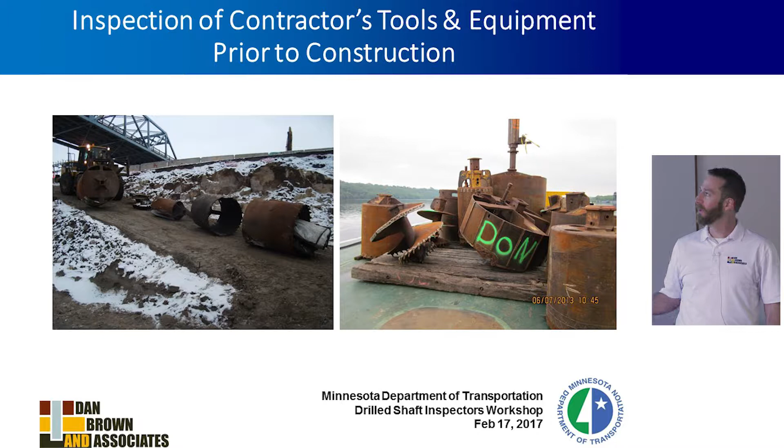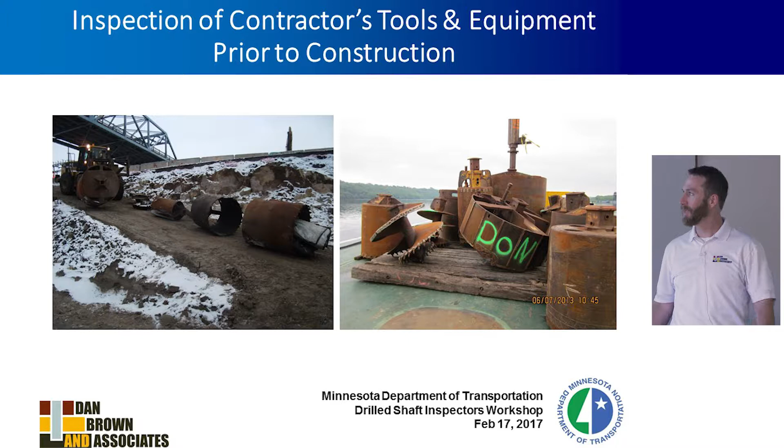All right, so we've gone over the forms and stuff. Now with boots on the ground, what do we look for? There's an installation plan. The contractor's described what tooling he's going to bring to the site, or she's going to bring to the site. Now it's time to go verify. So how do you verify? We've seen the checklist now, but now how do you actually make it happen?

So pre-construction, they've said what they're going to bring, so now it's time to go out and verify that they're on the ground and they're on the site per the approved installation plan. We want to identify, is there anything listed that's not there? Core barrels, augers, clean-out buckets, pumps, air lifts, air compressors, the list goes on and on. So now's the time to actually look for it and identify it.

Is the equipment in good condition? We'll get to that, some pictures of that. Make an inventory of the drill tool. So go down, take pictures, write everything down, everything that's on site. You ought to be familiar with that tool and make sure you have an inventory of that tool. And note that more tools can show up as the job goes on. So this isn't a once and done thing. This could be a living document. Check the dimensions, particularly the tools and the casing.

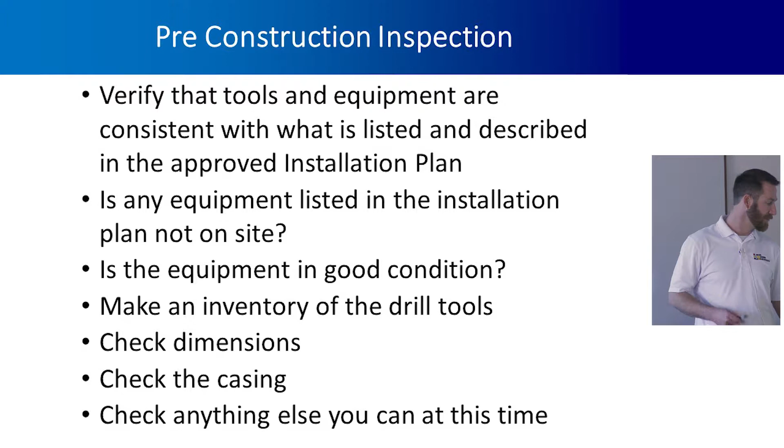Okay. All right. Typical installation plan will list the equipment. So for instance, the drill rig, this is St. Croix. Case was using a crane mounted rig. They tell you what the crane is going to be with the Series 2 drill attachment, the Calweld drill attachment you can see. And so all these little things that you guys know about, to make sure that they're not pulling a fast one. Vibratory hammer, boom on the crane, welding machines, all the earth augers, buckets and whatnot. So now's your time to make an inventory.

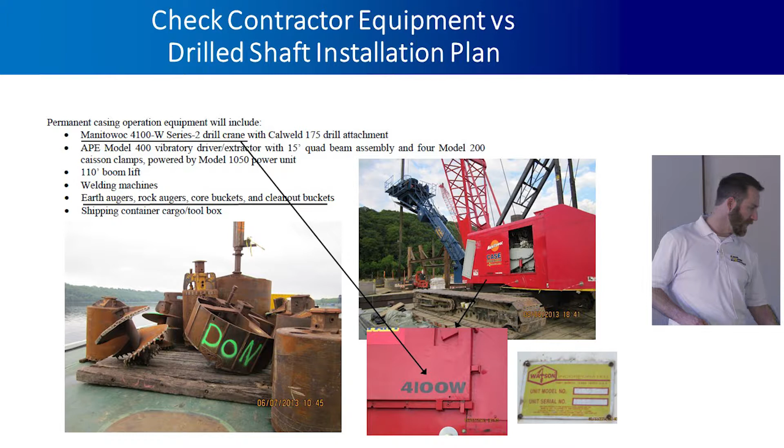So things to look at with respect to the casing installation, make sure they got all the tooling, not only to drill a hole in the rock socket, but to get the casing in the ground. The slurry equipment with the polymer unit, you'll need to make sure that the right amount of baker tanks are there, so they got the storage volume to handle their slurry operation, desanding equipment. All this stuff should be spelled out in an installation plan and a slurry management plan.

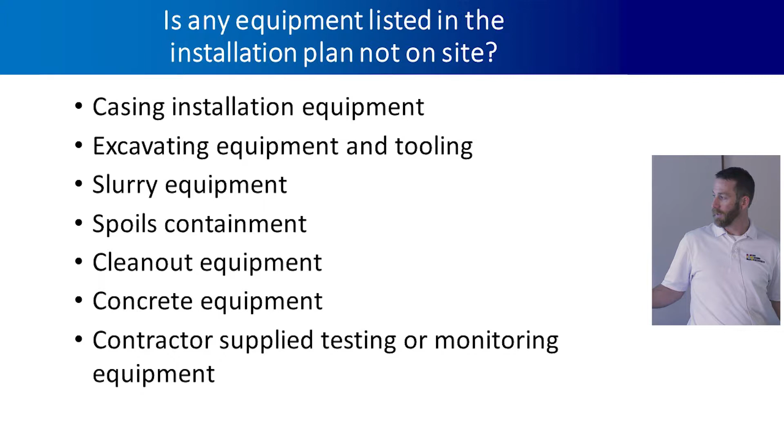Spoils containment, so do they have everything in place? Spoils barge when they're in the river, how are they going to get rid of the cuttings at Pier 1 when they're not in the river? Is there going to be enough plastic or visqueen on the ground to make sure the slurry or the cuttings don't fall into the river? Clean out equipment, all this stuff, tremies, are they watertight? Do they have pigs? And all the equipment for testing and monitoring.

All right, so one example, when you're looking at the equipment, it's laying on the ground or maybe it's up in the air like this Kelly. If you look at it, you can see the Kelly bar is bent. Well, imagine what's going to happen with a bent Kelly bar, especially with an auger. Of course, it's going to wander all around.

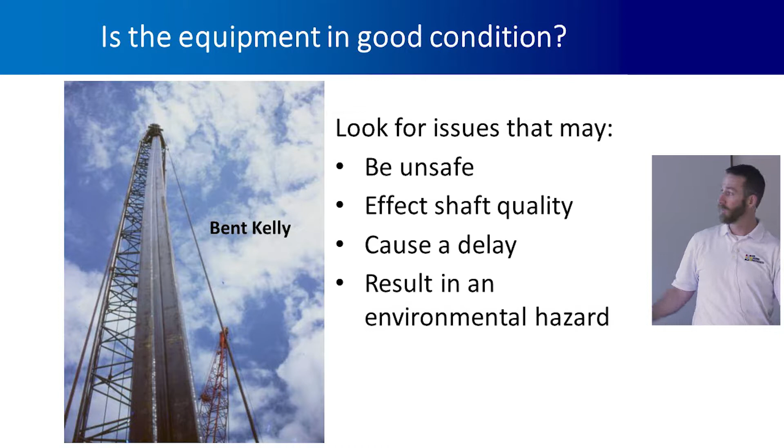If we don't get a nice uniform hole, when you put the cage in the ground after our final clean out and acceptance, that cage is going to scrape down the sides and pull a bunch of junk into the hole. We don't want that to happen. So things like that, keep an eye out for conditions that could negatively impact the safety or the quality.

Like John said, and David has said too, take pictures, they're cheap. It's not like we've got to develop them all. They're digital files now, so just take a bunch of them. I like having a separate camera, like a digital camera where I can put a timestamp on them. So when I go back in time after seeing dozens of job sites a year and hundreds of drilled shafts go in, sometimes one auger looks like the next auger. So I like having a timestamp and a date.

So all of these tools are different types of tools, different dimensions. They could be the same type of tool but different diameter. Remember at Red Wing, we've only got 7 shafts, but in those 7 shafts you've got 4 different diameters. Okay, you've got 10, 9.5, 9, 8.5, and I suspect, just like at St. Croix, they will bring in smaller diameter tools as well to drill pilot holes. So it may not go in with a full 10-foot diameter bite or 9.5-foot diameter bite. They may drill a 4-foot diameter pilot hole, then ream it out to 6 feet, then ream it out to 8 feet. I don't know. So there could be an awful lot of tooling on the ground.

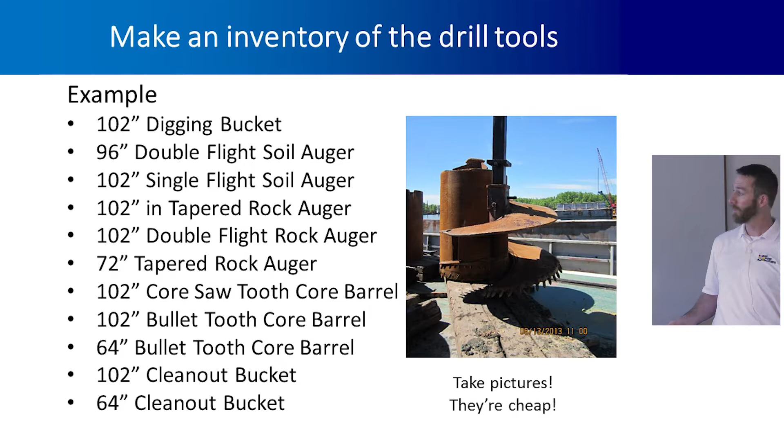So make an inventory of it, take pictures of it. Simple enough just to run a tape measure across it to look at the diameter, record the diameter of different tools. You saw Don's bucket on the first slide. Put your name on it if you want to, just to identify what you've measured.

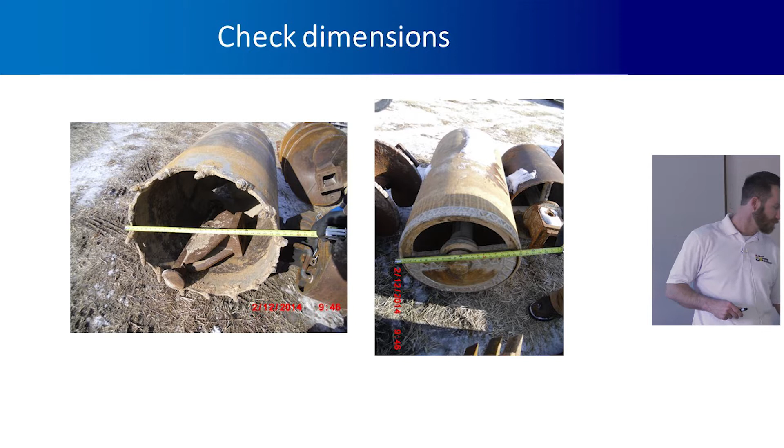If it's going to be twisted in, this can all be coming out of the installation plan. Contractor says, I plan to twist the casing to seat it into rock, but the casing doesn't have ears for the Kelly bar to attach. Well, you know you've got a problem before it's a problem.

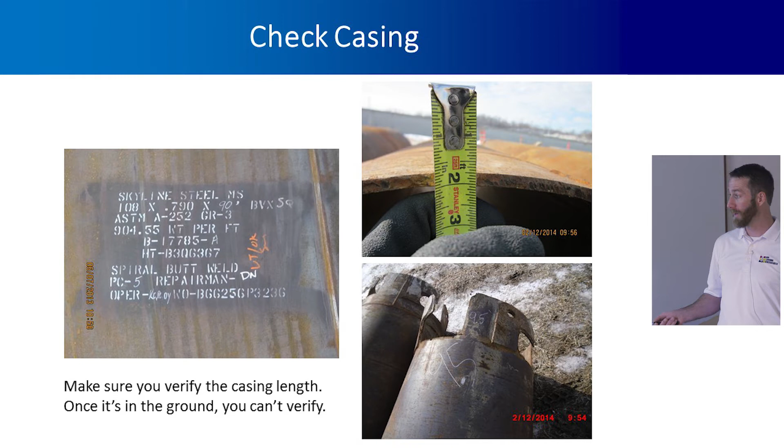This sounds elementary, but I have seen it be a problem, not knowing the casing length before it's in the ground. If you don't have a good measurement of the length when it's sitting on the bank, that's the only time you're going to get a chance to really measure it. Once it goes in the ground, you don't really know. You won't ever be able to find out again what that casing length is. So check it while it's on the ground.

Ad nauseam for the forms. I'm not going to spend a whole lot of time on the forms. So pre-construction, we want to verify the conformity to the approved installation plan. We spent a lot of time on the installation plan. Now let's make sure that they're living up to it. Bent Kelly bars, casing's the wrong wall thickness, not long enough. All these potential problems, we can identify them early. Let's identify them before they become a problem. That's probably a good rule of thumb for any conflict avoidance.

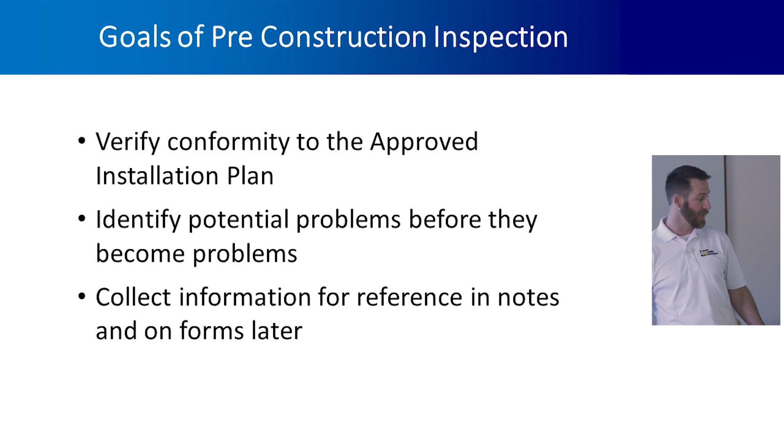Collect the information, lots of photos, tape measure photos, keep them in your notes. All this can become very important later. As John said, this becomes the only living record of what happened at site. And so pictures give a lot of information.